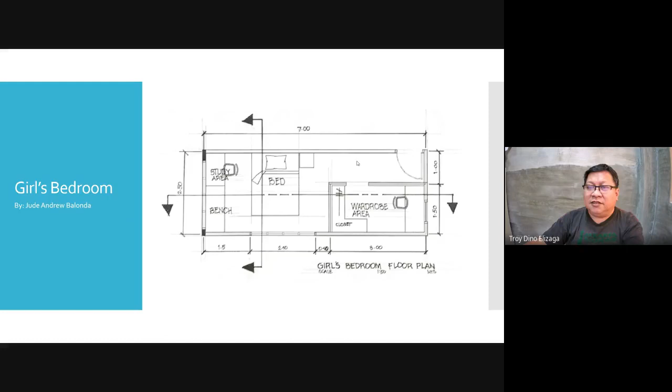And then you should use an alphabet of lines. Yes, because well, you went through Graphics One. I'm teaching Graphics One right now, so that's why I also look into how you applied what you learned in Graphics One. I'm going to show you an example.

This one, this one makes use of different weight for each line. The dimensions are very thin, and for example, for the bed, only the main outline of the bed is thick, but any details inside are thin. So even if you remove that, you know there will be a bed here, and you can also measure the allowances - the distance between walls and the bed.

And then for the section, they use gray because it's not as dirty compared to using black all throughout. And besides, you can see even the dimension line pass through that gray area. So in your case, you can use pencil if you have to do that. If you're using tracing, you can smudge the pencil at the back of the tracing, so you can still use the front for the ink.

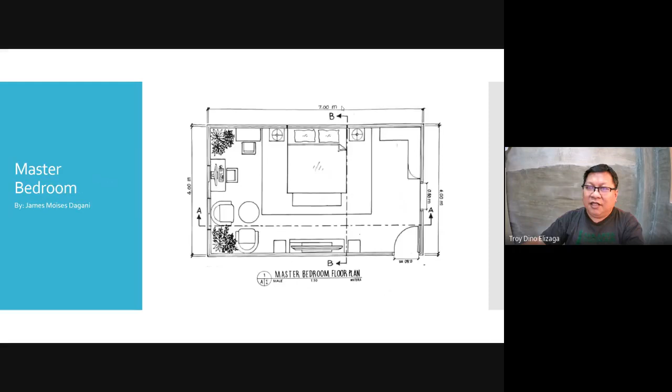The cutting plane line or elevation keys. Let's go back to the example. So this is the cutting plane line, and then here. This is more correct because there's an indication: B, B, A, A. This one does not — it's unknown.

But you can also use the elevation keys, like what happened here. This is like an arrow pointing that way, and it's number one. This means this wall is drawing number one, which is not what we see here at my right. So this is more common and neater — you can use this instead of the section line.

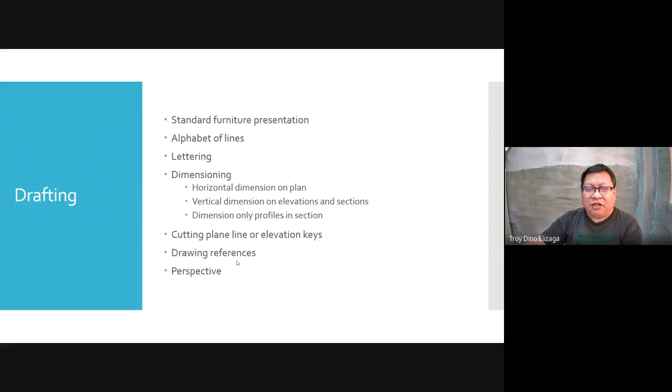And perspective — let's talk about interior perspective here. You should use man's eye view. There are a lot of you who use a bird's eye view, or like a giant man's eye view because it's above.

And the view should be from the wider part of the room. So we have a rectangular room, especially the very narrow one — you view it from the wider part so you see more, not from the narrower part where you see less, and everything is behind the bookshelf, behind the cabinet.

Then anything against a wall which was removed because it is in the projection plane should also be removed. If you're looking at a room, we remove the front wall so we can see inside, so anything against that wall should be removed — if there's a desk, even if it's not attached but against it, anything aligned to it — so that we can really appreciate better the arrangement inside.

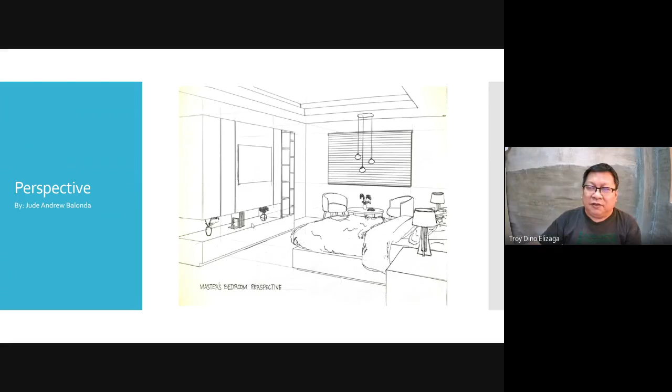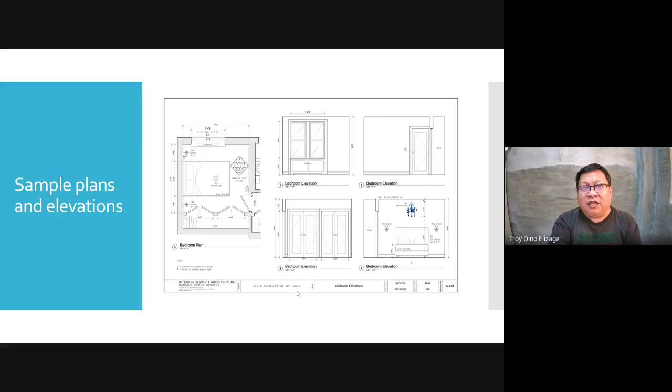The drawings you're making here are something like what you present to a client. In this case, the client is me. If I don't understand it, normally I would not get you as an architect because you cannot communicate to me. So please bear that in mind in your next plate.

And proportion your drawing to the size of your paper. I think the main problem here is the perspective — sometimes it's very small compared to the size of the paper. And sometimes you tend to cram all the floor plans in one sheet of paper. You can have as many sheets if you want.

I just realized that the required scale is 1:50. But when I received the instructions from the other teachers, I did not notice that. So for our next exercise, it will be 1:50.

Now let's talk about how to grade your plate from here on. I showed you a rubric before in exercise 1, but I realized it's a bit defective. For example, if I grade you according to architectural solution, there are things that aren't perfect, but then it's good in some aspects. So it's confusing how to decide whether to give a perfect grade or the second adequate one, when there should be something in between. So I broke that down into three.

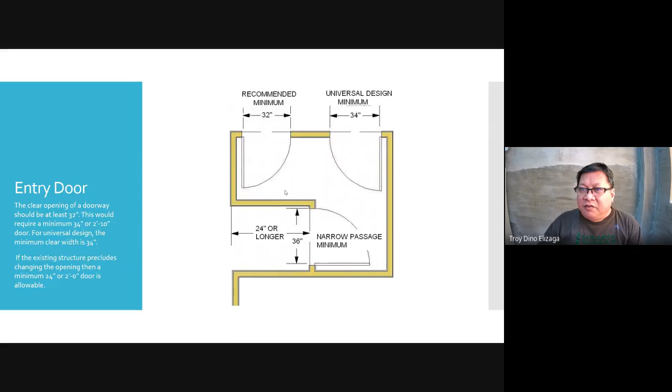What's important here is the clear opening. The clear opening is not the opening between jambs, it's the opening between the edge of the jamb and the door, because the door leaf is still an obstruction. So here, although the main door opening is 34 inches, the clear opening is actually only 32 inches.

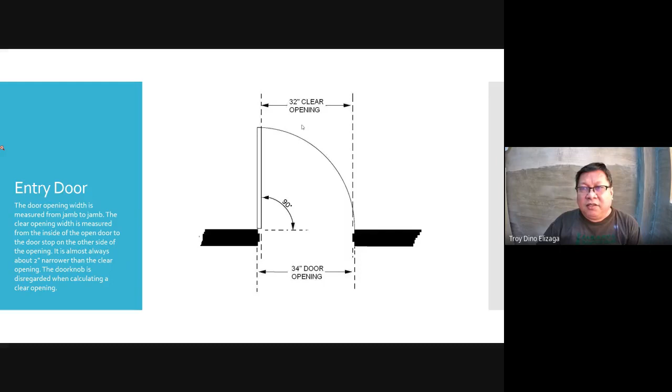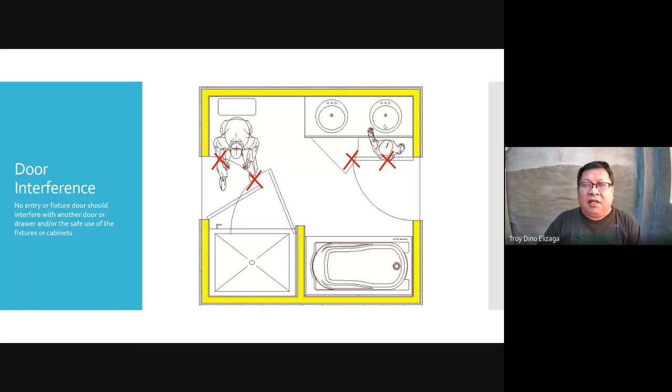Now, where do you put your door? Make sure it does not collide with other things, does not collide with a person struggling in the toilet, does not collide with the door of the shower or with another door like a cabinet door, or with someone using the lavatory. So if your toilet is small, it's best for the door to swing outside.

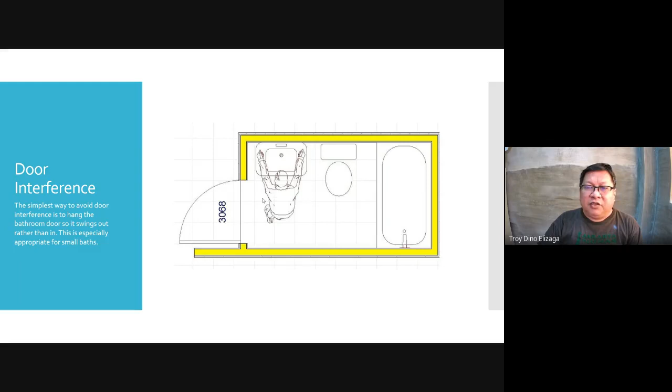Ceiling height should follow code requirements, so please check the National Building Code. And then there are clear floor spaces required for each fixture, how much is needed in front, for you to prepare.

I just listened to a video that said that the standard width of a toilet is really 5 feet. So this assumes 5 feet.

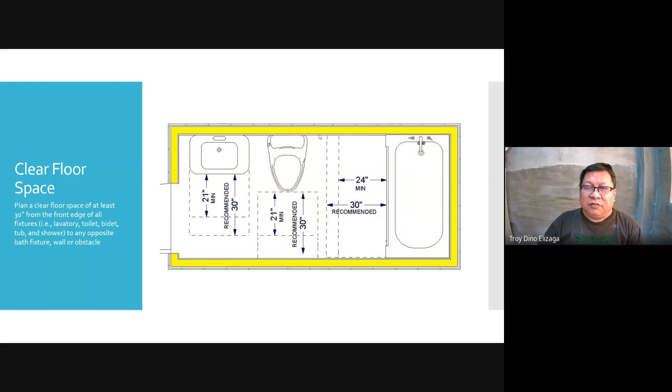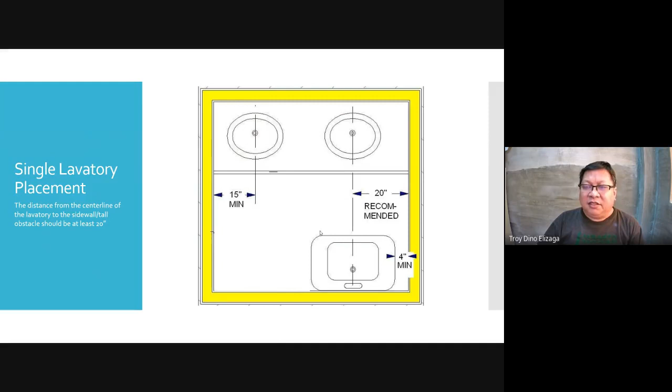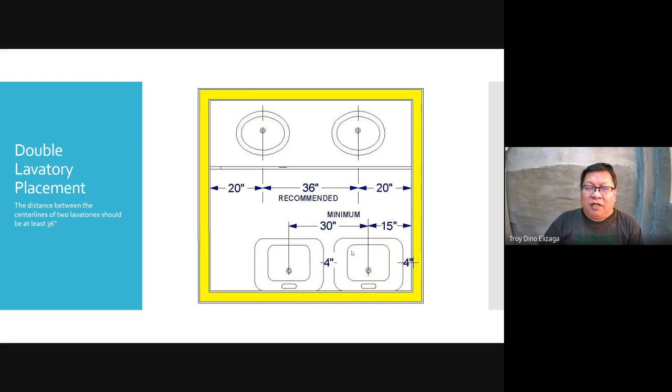For lavatories, if it's a countertop, we measure from the center of the lavatory to the edge of the wall. If it's a wall-hung lavatory, there's a minimum requirement of 4 inches. In between two countertop lavatories, there's a recommended distance of 36 inches, and there's also a recommended minimum distance between two wall-hung lavatories, as long as there's a 4-inch gap in between.

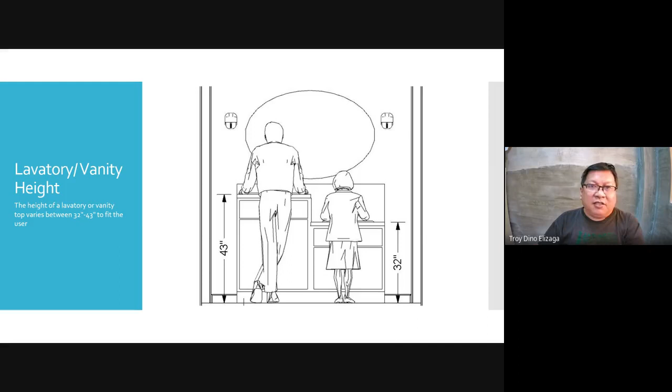Now, if you're designing public bathrooms, you might be required to provide for children, so there's at least one counter for children and the rest for adults. But in our case, in your exercise or for this house, it's not necessary.

Shower: a 30-inch diameter circle should fit inside your shower, even if you have to cut off a portion of that shower space. Like this one is chamfered, but the 30-inch diameter shower area is still inside.

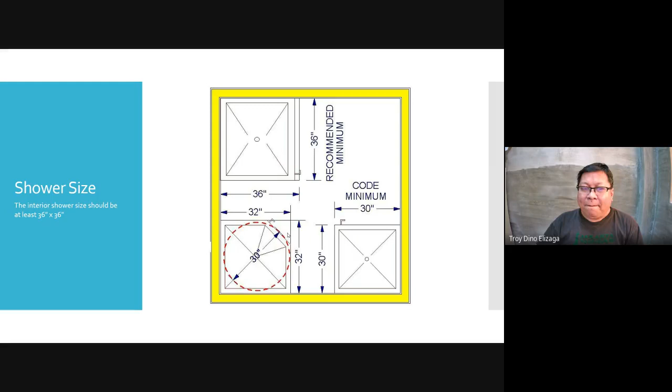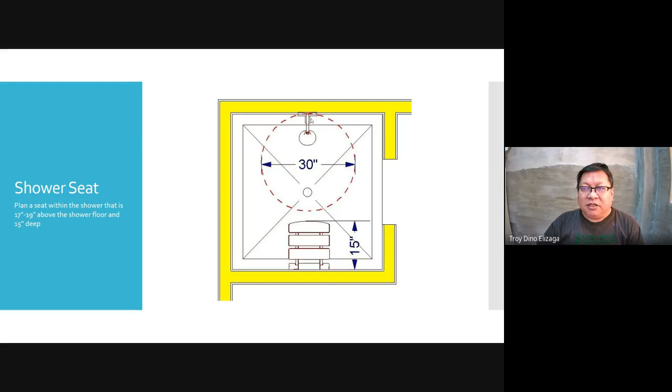For the controls of the tub and shower, there are required heights, and there's also a seat in the shower. It's not unusual, I've encountered this in some projects already. If a seat is required, there's also a dimension, 15 inches, and again, the 30-inch diameter shower space should be intact.

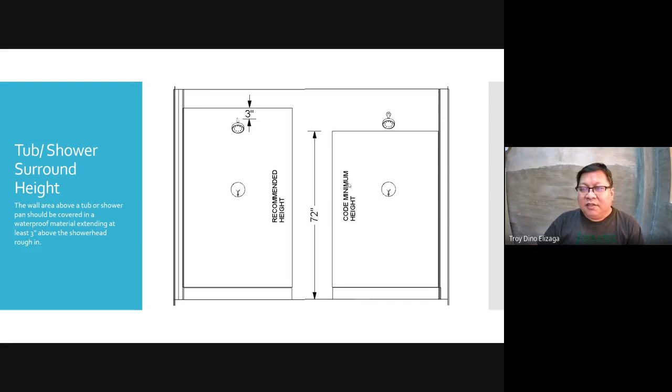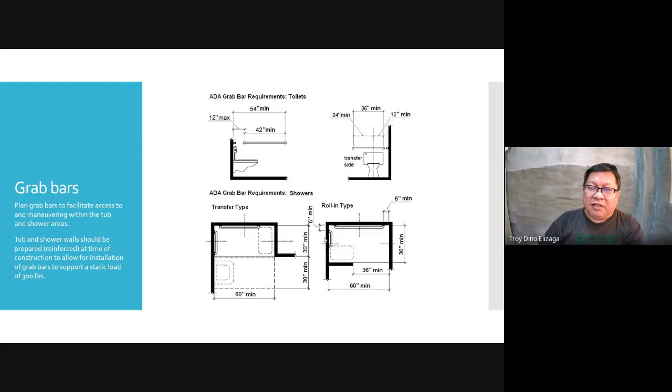Grab bars are required only if you're designing for public spaces. In the house, unless one of the residents is old, it's not required, and in your case it's not given in the program that there's an old person or someone disabled. But you should take note that there are supposed to be grab bars, and there are minimum standards, this one in height and the one before in plan.

Now windows: tempered glass. Although we will be discussing glass later on, these are the type of glass which, when broken, shatters into small rounded pebbles, or rounded glass, so that you don't scratch yourself. It's a bit expensive.

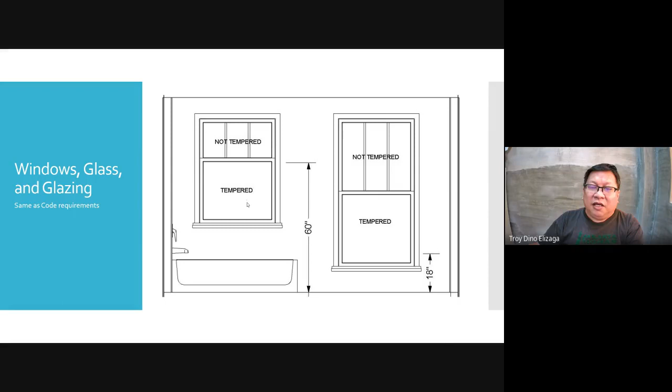There's a requirement here because there's a lot of activity, and there's a chance you'll hit the glass and it breaks. So for tub showers, regarding door swing direction, it's not advisable for the door to swing inside the shower stall. Imagine if you're inside, you'd have to go to the corner just to get out.

I experienced this in some of the toilets—not showers, this is really a toilet—in some of the shopping centers here in Bohol. You have to really maneuver like a contortionist inside the small space.

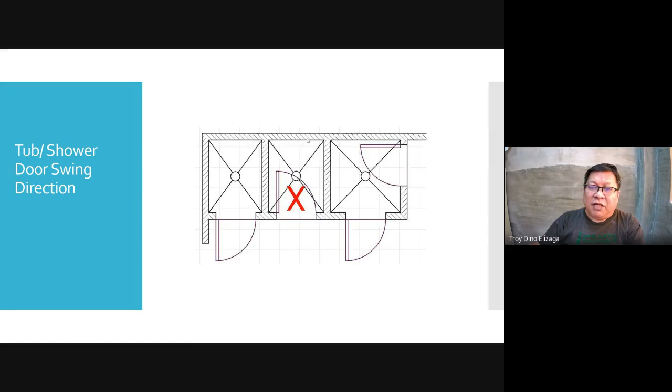You cannot put a glazed tile on the floor—it's very dangerous because it becomes slippery. So even with unglazed tiles, they still put a mat over it so you don't slip, especially for old people.

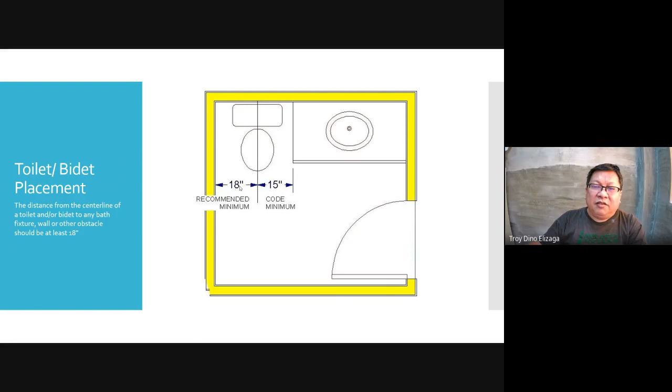For toilet and bidet placement, there are again measurements required towards the wall and towards the cabinet. A bidet is the equivalent of the urinal for women.

This one in the slide is a very rare layout—we seldom see a toilet and a bidet together—but I guess there might be a situation that calls for this.

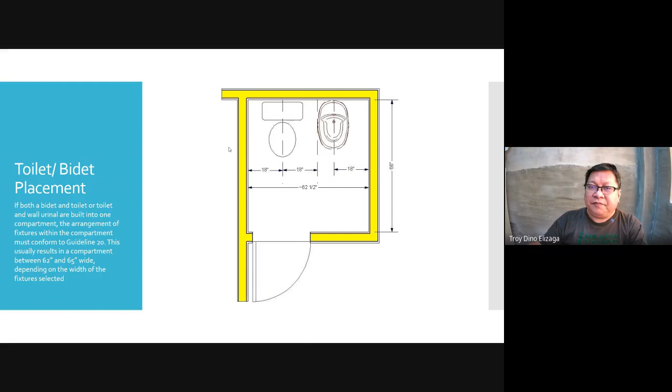For toilet compartments, it's better, if the space isn't big enough, that the door should swing outside. If it's long enough, like in the third case here, the door can swing inside. So there should be clear area in front of the toilet seat, which we showed earlier.

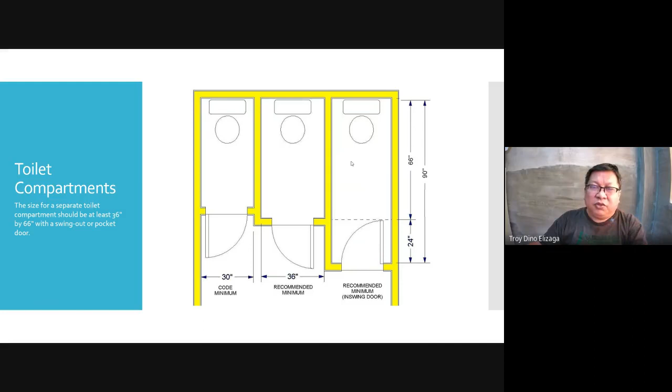A bathroom should have storage space—a place to put all the toiletries, cleaning equipment and paraphernalia you're going to use inside the bathroom, and even the towels and different types of towels. You can have baskets, shelves, or cabinets, as long as there is storage.

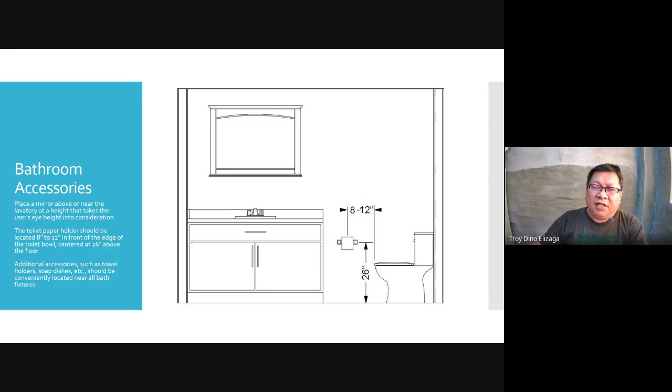We will need an outlet in a bathroom, especially for electric shaving and for hair drying, but you should not put it near the water source—definitely not along the shower or bathtub, and a little farther from the lavatory.

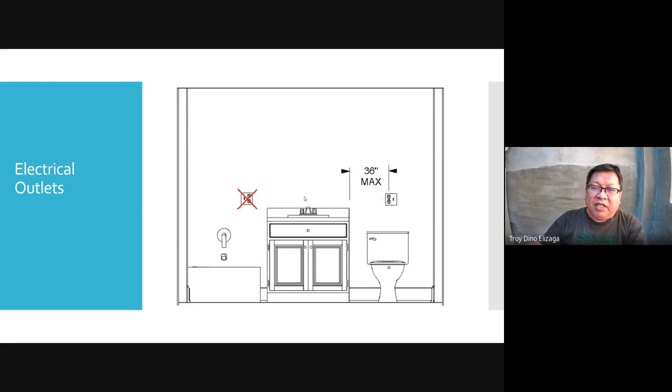Also, the light should be farther away, so that there are no accidents.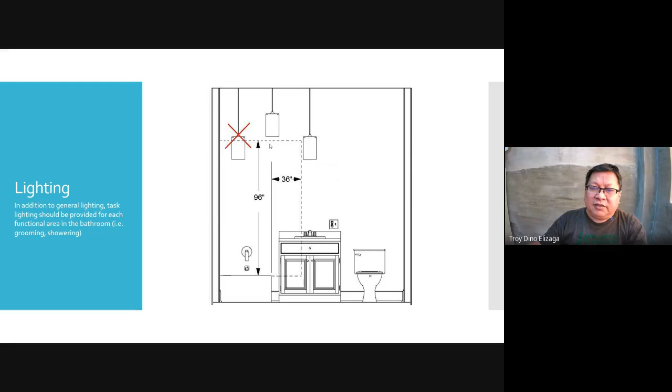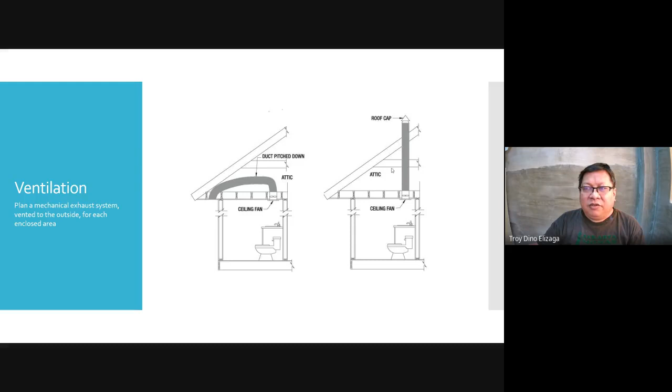Now, there are other rules of thumb for the layout. This is from another source, and I like the drawings—they're very architectural. One lesson is that we start with the basic: you have all the dimensions, a template for all the fixtures, and you make sure the arrangement is okay.

That's the time you start to tweak the design. Here, he decided that the lavatory should be a countertop lavatory, and that it should extend towards the toilet. So now he has that design.

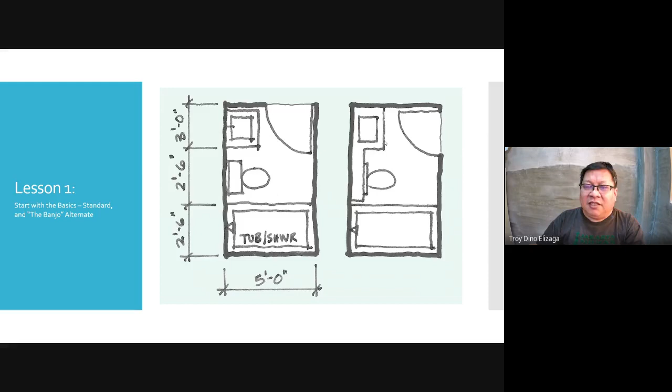Lesson two: three in a row—it's better to put all the fixtures on one side so that the plumbing is more efficient. You just have a pipe running here collecting the water and waste from all of them, so everything is on one side.

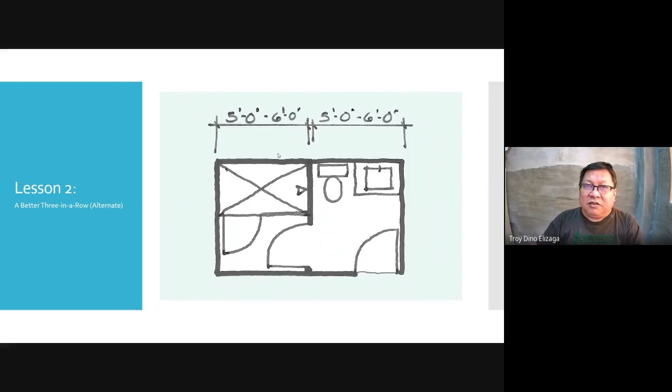This is another example, so everything is on one side. But if your bathroom or toilet and bath is very big, you can have fixtures on both sides, everything along this wall and everything on the other wall. Then you just cross one pipe to connect them, so you don't scatter all the fixtures around the room.

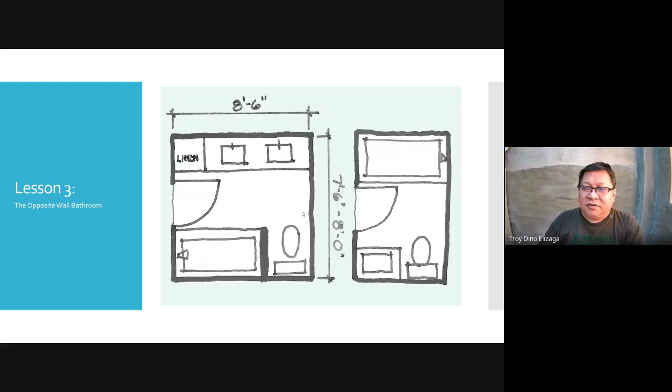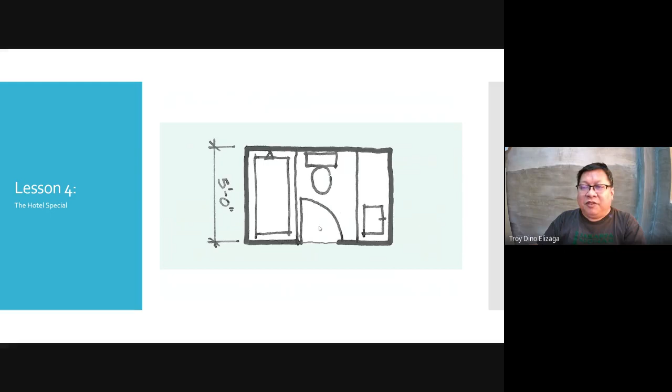This is the typical layout in hotels. You see the 5 feet, which I mentioned before, considered the minimum. In this layout, the lavatory is always placed so you have a lot of counter space. Normally this is all glass, and when you open it, immediately there's the toilet seat. For a house, this is actually uncomfortable for most people, but for a hotel, it's okay.

So this is a compact layout where you can put a door here or on the other side, and then the window could be on the side instead.

He says 5-piece master, so I counted: 1, 2, 3, 4, so there are 2 lavatories. Take note, in the master's bedroom normally there are 2 lavatories. Why? Because there is space for each, the husband and the wife - a closet for the husband, a closet for the wife. I mentioned the desk earlier, and also the lavatory, especially since according to studies, women take longer in the toilet or fixing themselves, so the man can use the other lavatory anytime. They can work together so they don't have to fight.

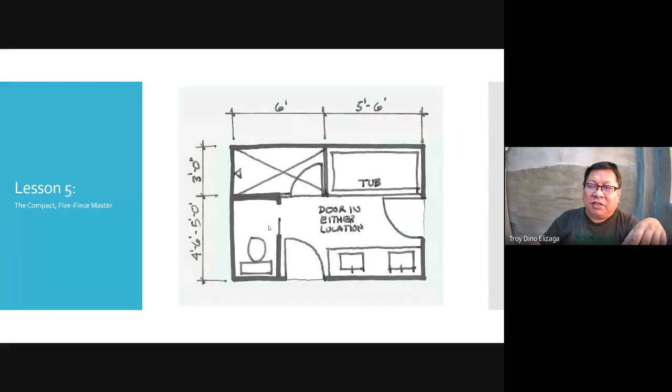Then there's what we call the shub, although this is not a very good example. It's not a technical term, it's not common, just presented here on the website I'm using. It's actually the shower and tub in one - you have a tub and then the shower above it. If you notice the examples we've given, the shower is different from the tub - this one is only the tub, that one is only a shower. But this shub is also my first time to hear about it. In the Philippines I think it's very common, especially in hotels, so it's acceptable.

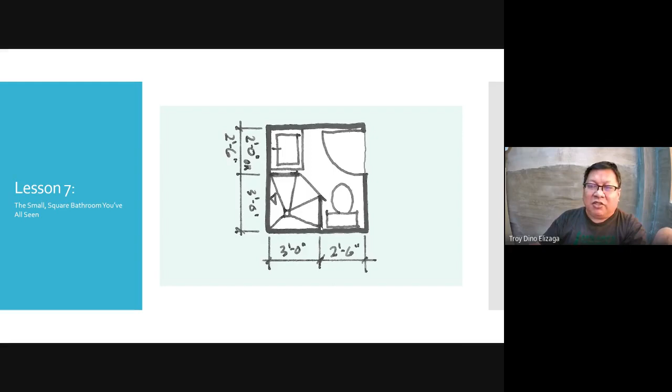There's also this layout, which is very common when the bathroom is square. Then a super tiny bathroom that I don't hate - this is another arrangement you can use if the bathroom is very small.

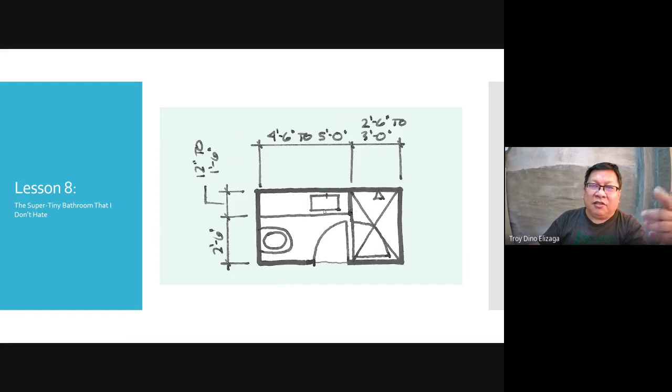It might be applicable on your plan, but the question is, in the end, how will it look like? How do you design it as an architect? You place the toilet bowl here, the lavatory there - two or three or more of you may have the same layout, but how will it look after? There's a big difference. There are exemptions, of course, when the space is very cramped - you're on the second floor, under the roof or under the stairs, so you still have to make do.

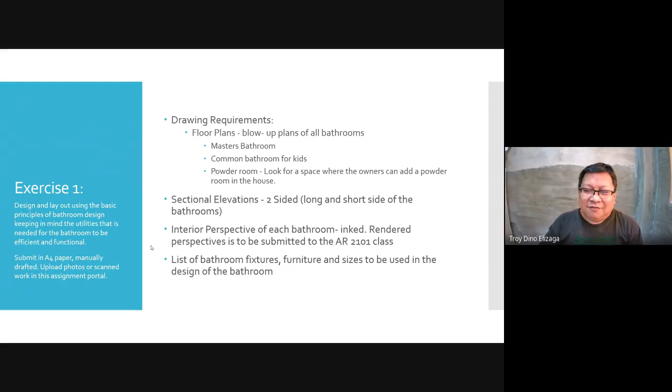Okay, so there are only 20 or 19 people. May I know who is recording? Because I did not record it, and I think any of you can actually record this. Is there anyone who's recording? Jean Lulisao. So please, if the recording result goes to you, please forward it to me also so that I can upload it. I had a problem last time with the recording for my one class, which went like 52 minutes, and although the recording was sent to my email, I could not open it. And then it said this guy recorded it, but he said he did not.